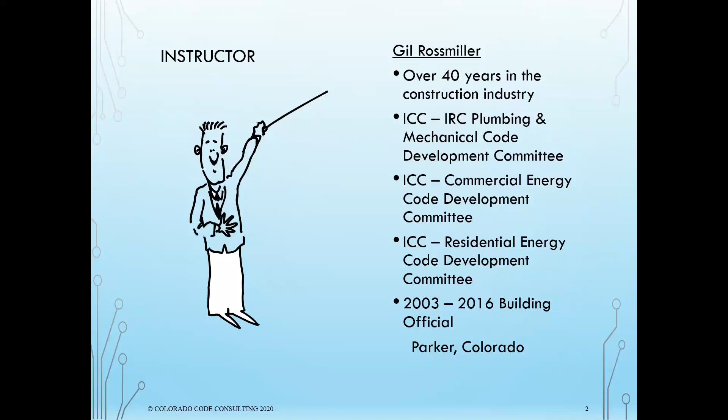So today, COMCheck. Like I say, feel free, type in a question, ask anytime you wish, if I start to go by something that doesn't make any sense, because believe me, there's going to be plenty of things that I say that might seem a little outrageous. So we're going to take a look at our thermal envelope, certainly the mechanical screens, service water heating screens, what we've got for interior and exterior lighting, talk about a few common mistakes that we typically see, and then take a look at some plan details maybe here, a few pieces.

So everything's free. This software is free. There's no cost to it. It is updated every 3 years, and they're constantly getting the bugs out of it, so there's updates every now and again. But you just go to energycodes.gov/COMCheck. There's the link there at the bottom. Just put COMCheck into your browser, and it'll pop up.

The nice thing is that everything's been updated. You can get everything from the 2009 to the 2018 IECC, along with the ASHRAE standards that go along with it, the 90.1-2007 through 2016. You can use COMCheck Web, which is the online version, or you can download it to your PC. If you have a Mac, you cannot download the desktop version. You have to use the online version. They stopped doing it for Mac a couple of code cycles ago.

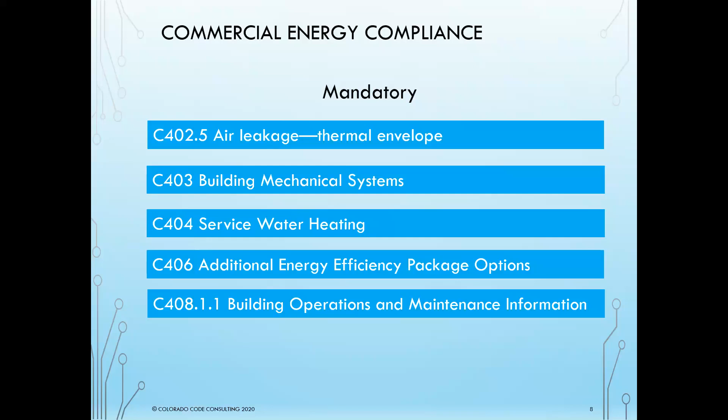So we've been over this several times. Commercial is easy: if it's not residential, it's commercial. I know, piece of cake, right? So the definition here for residential is detached 1 or 2 family dwellings, multiple single family dwellings, so a single family, a duplex, or townhouse, and any group R2, R3, or R4. But we've got to be 3 stories or less in height above grade.

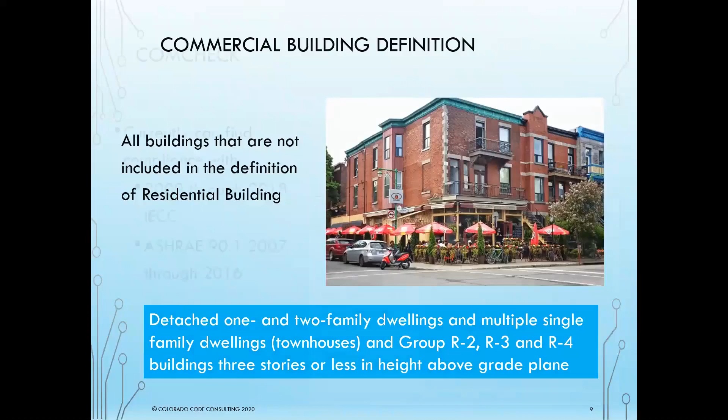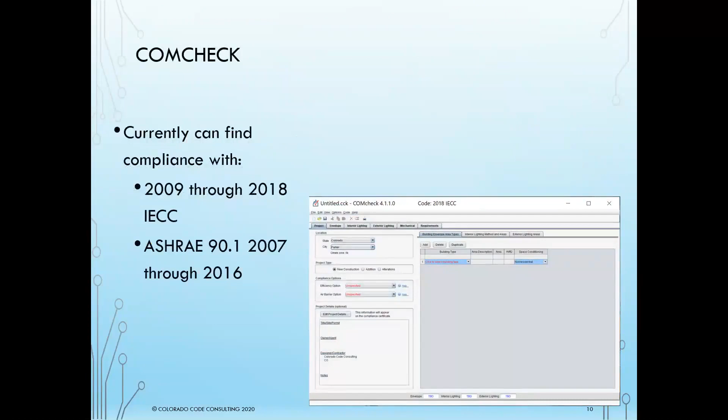Okay, so we kind of pointed this out earlier. We'll see the little drop down that we can find compliance with, and we're going to get everything from the 9 to the 18, of course, 7 to the 16, as it deals with ASHRAE. So here's what we've got. Building thermal envelope is the only piece that you trade off on, period. 9 times out of 10, we see that the slab-on-grade insulation is traded off, not always, but that's fairly typical. When you deal with any of the mechanical systems, it's pass-fail.

You either have the right efficiency and the right fans or you don't. Interior and exterior lighting, same thing. You either meet the watts per square foot, or exterior lighting for parking lot lights, or light washing the building, lights lighting up the building. It's pass-fail. So you either do it or you don't. No trade-offs. Can't do it.

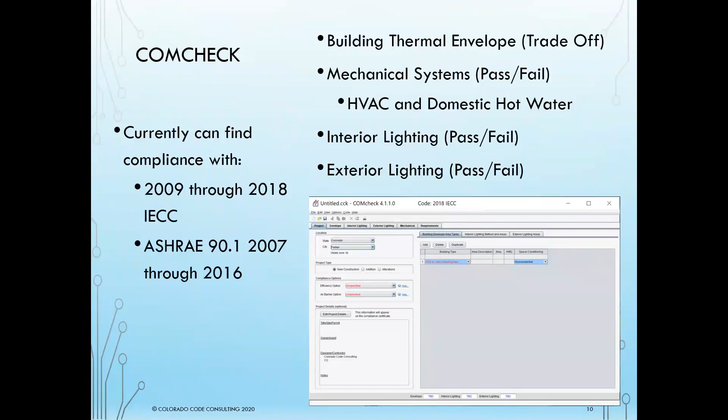This is a code section that allows COMCheck to work. Before the 15, there was no section like we had in the residential code, where it talked about the total UA trade-off. This is very similar to that. The piece that's underlined here is the piece that was added in 18.

Okay? So the beauty of it is that in the bulk, in that first paragraph there, it basically says it doesn't care what the U value of any of your stuff is. Look at that, U, C, F factors in these tables, we don't care. And you can have as many windows as you want. That's what this maximum allowable fenestration area section talks about. As many windows as you want.

So if I'm using COMCheck, and COMCheck now works correctly, it didn't always, but it does now, I could have 100% glazing on the outside. And if I've got really good windows, I'll be able to pass, and I won't have to go performance.

Because if we do prescriptive in the energy code, at least commercially, 30% is our baseline. I can increase to 40% window to wall area if I have daylight controls. But once above 40% and I'm doing the prescriptive path, I've got to go performance unless I'm using COMCheck. If you can get COMCheck to work, more power to you.

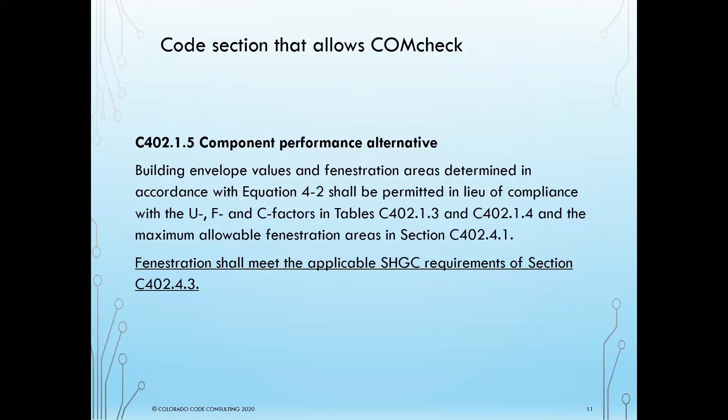Here's the equation that they talk about. Basically, it's just a great big fancy spreadsheet. If you sat down, you could just make a spreadsheet on it and move on with life. Not that we're going to get into that, but this is the equation. Honestly, I made a spreadsheet, and it actually works quite well. COMCheck is much more sophisticated than that, but what it boils down to is a spreadsheet.

So it's basically a trade-off between what the table allowed U values and maximum areas are, and what you are actually doing in your building. That's what any of these softwares do. They create this geometric twin within the software. Once I get the building built, the software says, if I built it per the code, this is what it would be. And is the way I'm going to build it as good or better than the way the code would have done it? So it all goes back to the prescriptive tables as the baseline. All of them do the same thing.

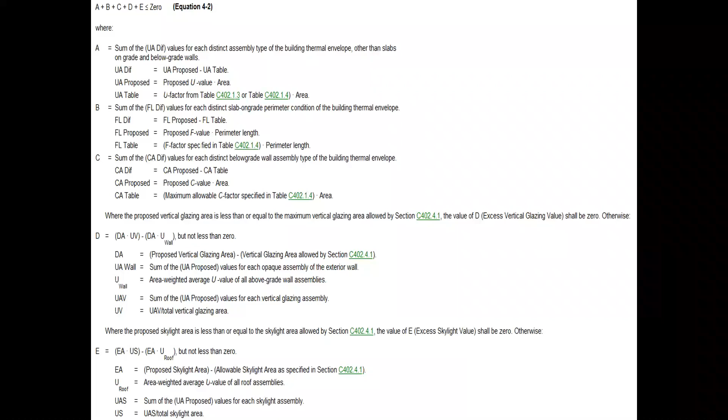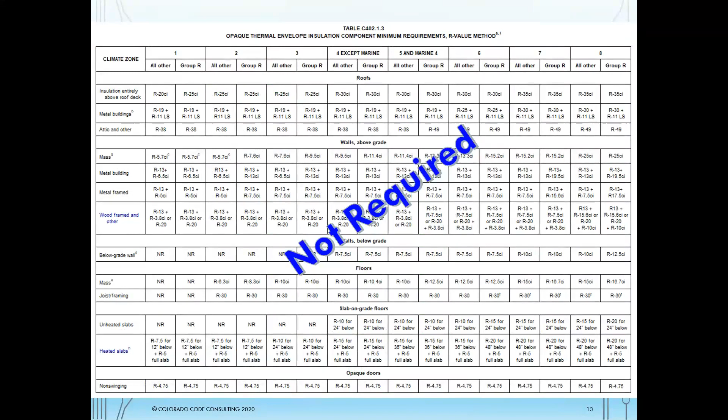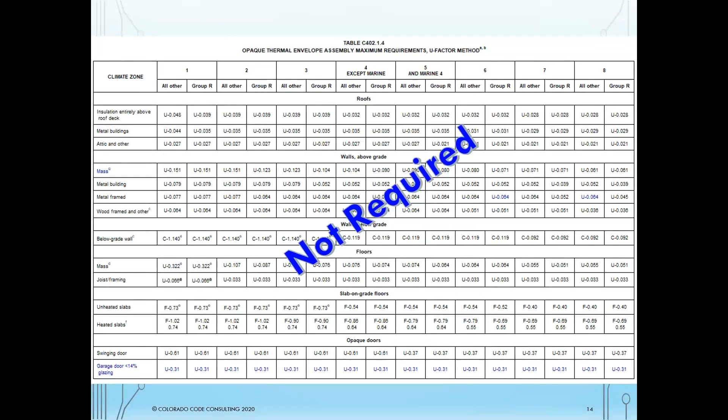So here's that table that's not required. If I'm using COMCheck, I don't care what this table says, because I can build it any way I want. Now, what we call the reference house within the software is coming back to this table here. It's the R value, or more specifically, the U value table. Doesn't matter. Don't have to worry about it. Use what you want, but this is what the reference house will use. This is the table.

Then we've got this maximum area piece. Remember that? Don't have to worry about it. Maximum area, we don't care. As much glass as you want. 100%, 60%. As long as the math works, as long as my total UA comes out to less, we're in good shape. Or the same. It could be identical. Doesn't matter. I think I have an example where it's exactly the same.

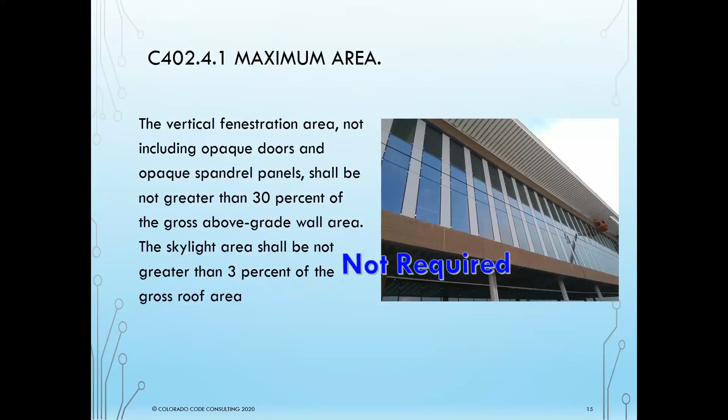So here is my fenestration table. We don't have to worry about the U factor up there, all the X's through it. All we've got to worry about in this table is the solar heat gain coefficient, whether it happens to be a skylight or vertical fenestration, the difference between a window and a skylight. The things in blue there are the only things that actually changed. So we had some solar heat gain coefficients change in climate zones 4 and 5. And for those of you that are unaware, it's all based on direction, okay?

And what we call projection factor, and I'll show you what that means. We've got some wonderful little pictures that show you how that works in COMCheck. They've got little pop-ups that are very, very nice, okay? So that's the section that actually allows COMCheck to work, and the nice little buffers and things that COMCheck will

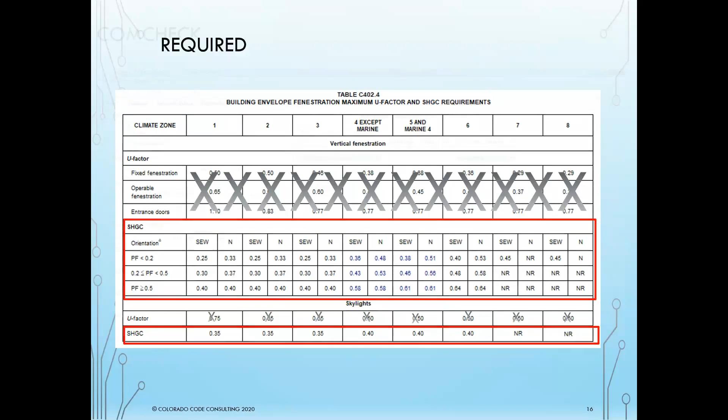allow you to do. All right, so here's just a screenshot, and we're going to start here with what it would look like if I were to open up a project in COMCheck. This is the desktop version of it, and we start to pick what it is we want to do with it. Okay, so we do a drop down on the code. We're going to have, obviously, much more choices in the 18 version. This is clearly a screenshot from an earlier version, but you go all the way up to the 15 and

the 18. Then the codes you see below there, the 14 New York and Carolina, these are special ones, and so they have amended the code. So this brings up a great point. If you have amended the energy code so it no longer matches what the code says, you can use COMCheck, but you're going to have to figure something out. So for instance, let's say you make it more restrictive or, quote, more energy efficient. So instead of saying you have to have an R20 wall as an example, no, it's got to be an R23, right?

You would have to figure out then how much percentage-wise they would have to pass by, and jurisdictions have done that. Jurisdictions will say, well, if you use COMCheck and you base it off, in this example, the 2012, we've actually made it more energy efficient, so your thermal envelope has to pass by at least 3%, as an example. There are some jurisdictions that have made it less restrictive or, quote, less energy efficient. And you would do the same. You would just say, well, you could actually fail by 3% and still pass. And so the jurisdiction would have to figure that out.

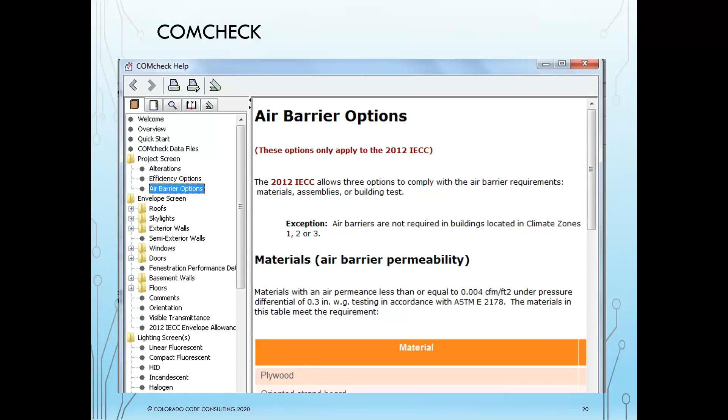So here, project, we're just picking out the location. So it's got all the states in there. It's got most of the cities in there. The directions are, if your city doesn't happen to show up, pick one that's close.

There was a time Parker wasn't in it. Denver was the closest one, but now actually Parker's in there. So they've got quite a few cities in there. This one happened to be picking new construction.

This is the slide. So we've got these energy efficiency options, and this is kind of nice because what the software does now is it actually keeps track of it. So there's obviously far more choices now than there was in 2012, 18. I think there's 7 or 8, maybe 9 different ones that you can pick. The beauty of it is that once we pick one, it needs to be throughout.

And this is one of the mistakes that we start to see, and it's not that uncommon. What ends up happening is if we have a COMCheck that's done, you might have the architect that does the COMCheck for the thermal envelope. And then you might have the mechanical guy that does it for the HVAC heating and cooling systems and service water heating. And then you might have the electrical designer do it for the interior and exterior lighting. And that might be 3 separate COMChecks that they're creating, and they may not pick all the same options.

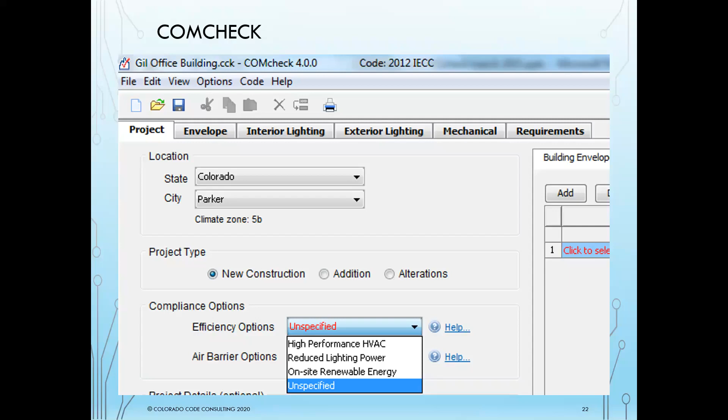Then we've got the different air barrier options here. We've got the air barrier permeability, which is just that big list that we've got. The assembly piece, which is I have a certain assembly, the plywood or whatever the assembly is, the sheetrock and the studs, and they can have a test. They can actually test the assembly if they wish, or they can decide to do a blower door, and that's still the same in 2018. That is not a requirement. Blower door is not a requirement for commercial buildings in the 2018. It still remains not required.

So we've got project details, so we've got building envelope areas that we need to put in here. So we're still on our very first tab. So we've got tabs here that we're starting to fill out. So this is the first tab, project, building envelope area types. We got to get those put in, or it won't let us go any farther. It'll keep saying not done. Now here we're just picking out what the building type is, and this list goes on. So we just pick what it is. And we can have different building types, right? So we might have different pieces within a building, which is fine.

And then we just pick an office. I just picked office for this particular example. We put what the area is. I didn't decide to put in an area description. The designer could certainly do that. And then is it residential or non-residential? Well, office is pretty obvious. It's non-residential. So that's pretty clear. You'll be able to see that on the report too.

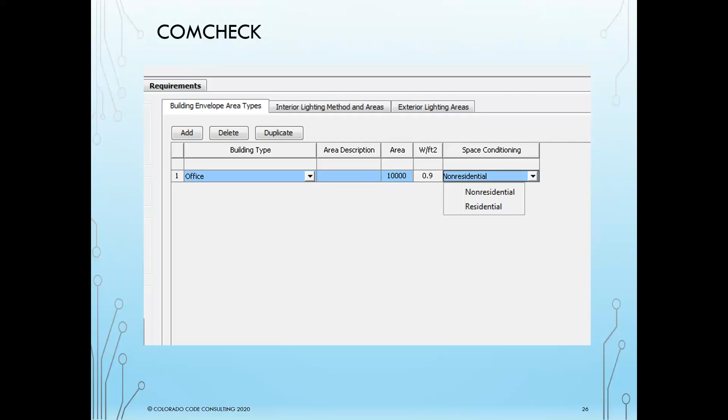And then you'll notice that we've switched tabs here. So we've moved from building envelope areas to interior lighting method and areas. So we've got two different choices here. Building area method. We've had this since 2015, and ASHRAE's had this forever. Building area, I would just take the entire building. So if it's an office, I'd say the whole entire building's an office.

The office has no hallways, it has no conference rooms, it has no bathrooms, it has no storage areas. It's just all the wattage is the same throughout the building. Then, as I've selected here, we have this space-by-space method piece. This is a fairly popular one because you get more bang for your buck.

Now you can actually go to different spaces and say, okay, I've got a break room area, I've got lobby areas, I've got office areas that are open or enclosed, I got a restroom, I got a stairway, I got storage. And so we can go on all these different types to get these choices to say, oh, well, I want so many watts per square foot here and here and here. And the biggest bang for the buck is the retail. Retail areas, you really get the big bang for your buck.

Retail areas, you can really pile on the wattage for the sales areas, depending on what you're selling. There's 3 or 4 different increases that you can get so that you can have more light on your clothing or on your jewelry or your pottery or your pictures, whatever it is that you're selling. So you can really get a lot. And if you pick building area, you can't do that. It's just straight wattage per square foot. So that's why you'll see a lot of space-by-space methods.

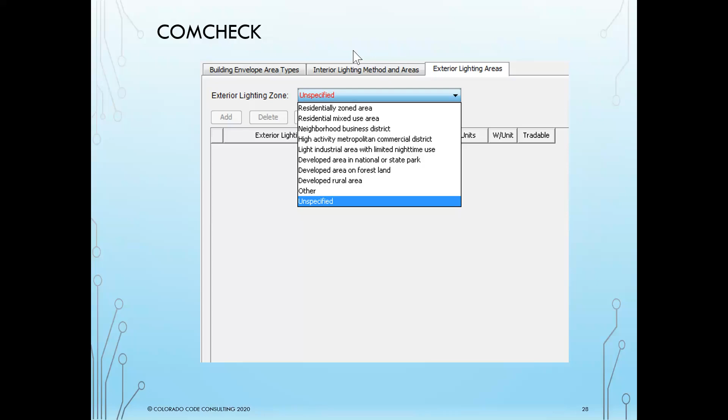These days now, with the advent of LED, I rarely see any exterior stuff fail, just because of the technology that we have today. Let's see. So I picked a neighborhood business district just for something to do. Then we can actually go through and say, well, what do we got? All kinds of different choices, different lighting allowances for main entries or parking ways or driveways or the entry canopy. You're going to have exemptions that you can put in here, emergency services, loading area, things of that nature. There's going to be things that are exempt for this.

So anything that has to do with life safety, means of egress, any of that type of thing, or maybe it's a high crime area, as an example. They always want the alleys in the back of these buildings lit, which would be perfectly acceptable. That would be exempt from any of the wattage requirements, as an example. So they just pick what they've got, ATMs, where they have walkways, stairs, any of that. If they've got it, they can use it, not a problem.

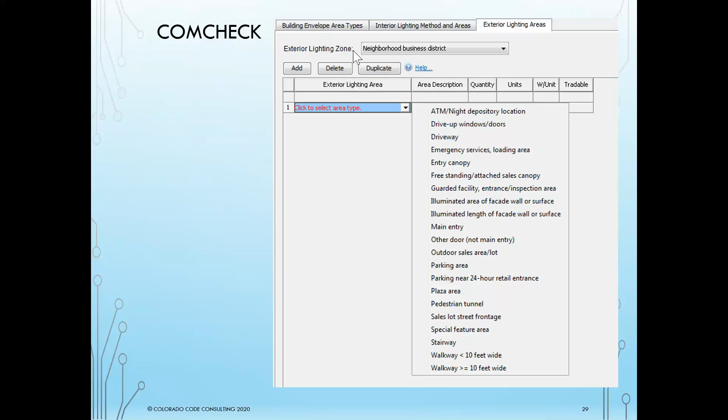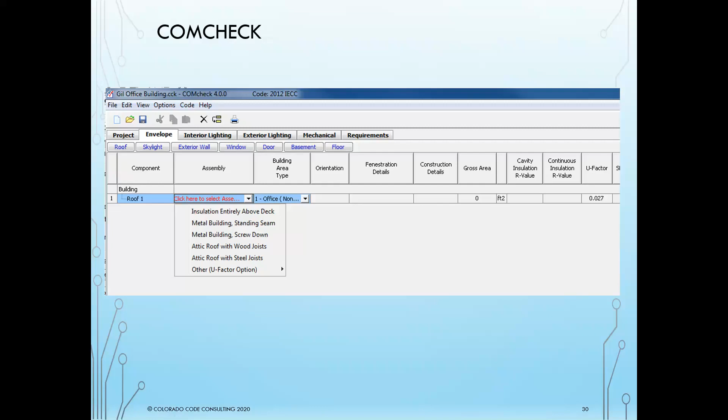We've got metal buildings, standing seam, metal building screw down, attic, roof with wood joist, attic with steel joist, and then we've got this other option, which we'll get to. All of them got an other, and I'll show you what that is here. I just, in this particular case, said insulation entirely above deck, and of course what popped in there was what we had in the very beginning. Remember, we actually put in that office piece in our project tab.

So if I had several different areas, I could separate the roofs out. So while I'm at that, you can glom together or put together all like assemblies. And you'll notice that I'm not using an orientation here. You don't have to use an orientation. Okay? You can actually put all together. If all the roofs are the same insulation value, all over the entire roof, you can just put one roof in. The only time you'd have to do another roof is if it had a different assembly.

So let's say you got some that have an R30 above the deck, and let's say you got some that aren't, well, they're only an R20 for whatever reason. Or I've got two different types of roof. I've got some flat roof where it's all above the deck, and I might have some vented attic space. I mean, that's absolutely possible. So it's depending on how many different roof type assemblies you've got, but if it's all the same, you only need to put in one. Okay.

All the software wants to know is, what am I doing for cavity and what am I doing for continuous? Because it would be in addition to any of those other assembly pieces, sheathing, sheetrock, that stuff, already in there. That's why there's the other category, and we'll give you an example of that. Do not panic. We will give you an example. So anyway, this one, I don't think I put any continuous, and here we get all the different types.

So we got wood frame, 16 24, steel frame, 16 24, metal building. Okay, so we've got a steel frame building; difference between a steel frame building and a metal building. So steel frame building is going to be steel I-beams and metal studs, essentially. So we got I-beams that are pretty much the structure, and then steel studs that run between them or in front of them, just to create the exterior walls.

A metal building would be like a Butler building, where we've got purlins, a giant superstructure, and then purlins or girts for the walls, and then we've got insulation that's going to be sandwiched in between them. So here, again, we run into all different sets. So if I pick solid concrete, or I come down here and I pick a concrete block, well, then I get a whole bunch of other choices.

Well, what is it? Well, you tell me, because is it 6, 8, 10 inches, partially grouted? And then you're going to say, oh, well, if it's partially grouted, cells empty, what does that mean? Well, we can go back to help. What does partially grouted, cells insulated mean? Well, go back to the definition.

Now, there are limits to how many of those cores can be filled, grouted. So we've got vertical cores that'll be filled. I mean, they're all going to be reinforced. I don't know how many unreinforced buildings we get built these days, unreinforced masonry. I don't know that we do. Then we've got what this insulated means.

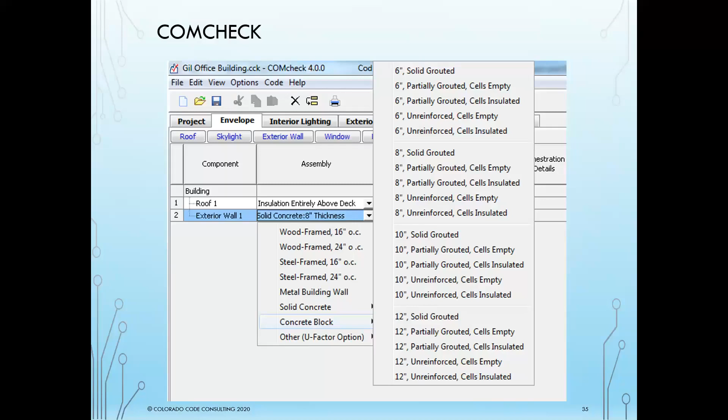Okay? All right. So we just happen to say furring none. We don't have any cavity or continuous, so I just set that in there for fun. All right. So let's say other. So now we're going to get into this whole other piece. And this you will see on commercial buildings far more than you will see on a residential building. And what this allows the designer to do is to design their own wall, or their own roof, or their own floor, because they all have this option.

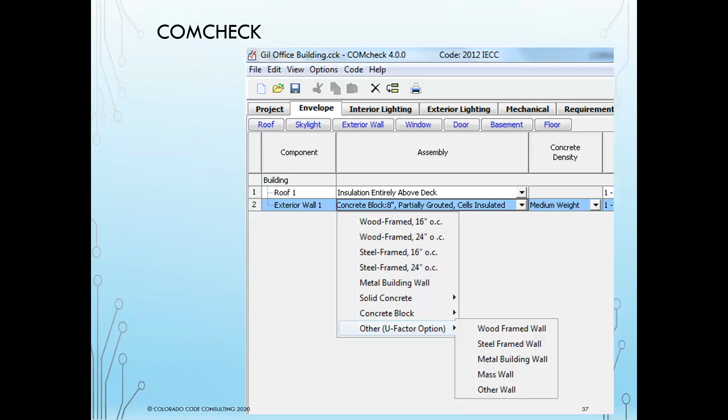Meaning, you know what, I really don't like what COMcheck does for defaults. I really don't like my R values for the sheathing or the decking. And you know what, my framing factor is a whole lot better than what they say it is. Okay? So once I pick one of those, this is what you get. This is the little warning that comes up to the designer. You never see it on a report. You'd only see it if you actually do one.

It says, assemblies with a known assembly U factor: enter the overall assembly U factor for the assembly in the U factor field. The U factor is assumed to be consistent throughout the entire assembly. So what that statement is saying is, if I build a wall with 2 inches of foam on the inside or outside, half-inch OSB, 16 on center metal studs and 5/8 sheetrock, it's that way throughout the entire building. Okay.

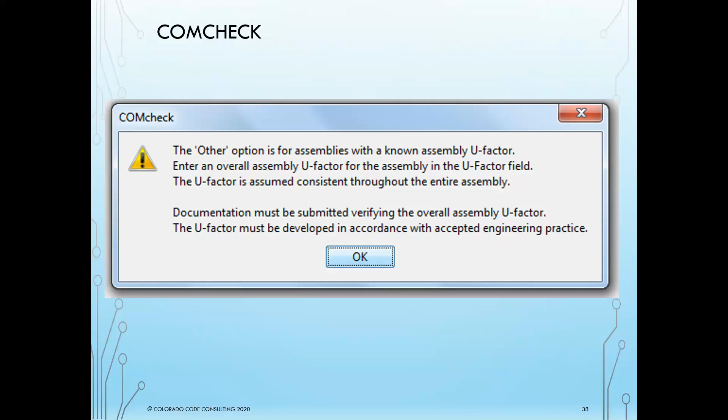Then the most important piece is documentation must be submitted verifying the overall U factor assembly. It must be developed in accordance with accepted engineering practice. So what they're talking about is the ASHRAE Book of Fundamentals. Okay. So what we're going to look at here is just a really simple wall assembly. Nothing particularly fancy here, but it gives you an idea of how and what you should be looking for.

Okay. So we have R value at the insulation itself. Yes. We're going to have an R value at the stud. So we kind of have two different columns going on here. Because we have cavity insulation in this assembly, there's going to be a thermal break at the stud itself. So as I start to look down to the very top here, we've got 0.17, and that is my exterior air film. So these do have an R value. It's in the ASHRAE Book of Fundamentals, and what I'm using here is the generic ones that are generally accepted.

So if you see anything different than this, it shouldn't be too different. It should be pretty close to what this example says, regardless of the assembly. So we got a 0.17. Then we come down to my half-inch wood. It's got an R value of 0.18. Oh, well, we'll get to that.

Then I've got, looks like a 1-inch insulating board. Got an R value of 3.57. It's the same at the insulation as it is at the stud because it's continuous. It's over the top of the stud. Then the next piece we got is the R13 batt. So the R value at the R13 batt is 13.

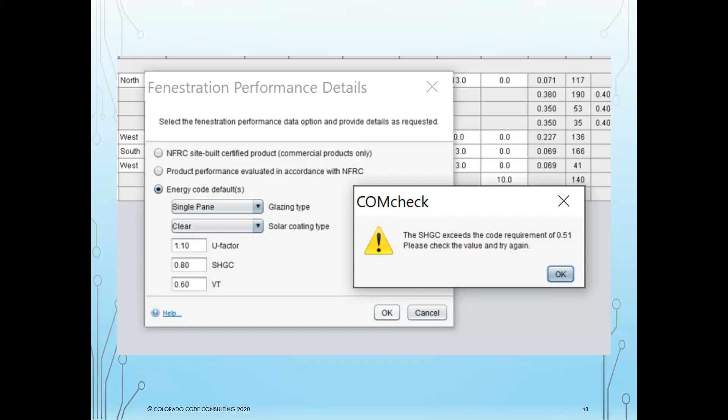Maybe there's another reason. You're putting in an addition and you want the whole building to comply instead. That kind of thing. Okay? All right. So now let's see what we got.

Doors. Yeah, don't worry. We're going to get to that. I don't know why I don't have it yet. Maybe I have it toward the end. But I do have examples of what we would use for plan review for the U values and solar heat gain coefficients, and what document you should see, because you won't see the actual CMA certificate until the windows are showing up at the job site. But there is a document that we can get for plan review purposes, and I do have an example of that. It just must be later in the slides.

Sorry about that. So teases you, keeps you on the webinar. Yeah, I know, it's so intense.

Okay, so now we just go through the other different components here. We got doors. We've got projection factors. Again, glazing. So if we've got doors that we're putting in, is it insulated, metal, is it wood, glass? If anything is greater than 50% glass, it's considered a fenestration. You'll have to meet the window U values. Otherwise, if it's less than 50%, it meets the opaque values.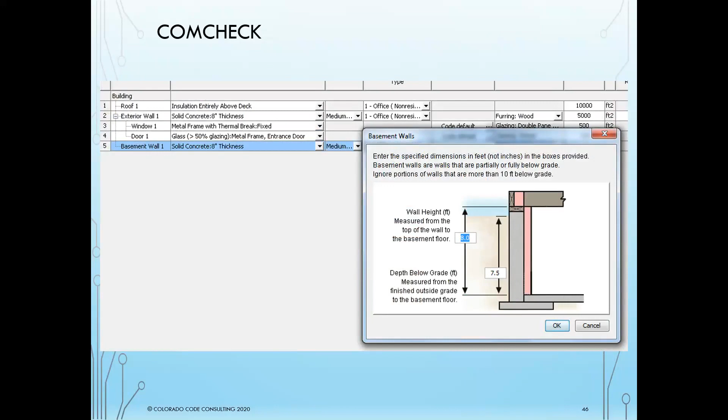Here's the nice little piece that comes up when we deal with slab on grade. Again, this is probably one of the biggies that they don't get. They might show that their slab on grade has insulation. They might say, it's got an R10 and we're 24 inches, just like I'm supposed to be. But when you look at the construction details, they all stop right at the bottom of the slab. So rather than coming all the way to the top, like it's supposed to be here in the picture, it stops right at the bottom. That does not count. You cannot allow that to work.

You can do any of these things in this particular picture. You can do upper left there that's got little a, it'll be on the inside, it can be the outside, it could be vertical, it could be horizontal, it could be vertical and horizontal. It could be all of it. But what you can't do is not start at the top of the slab. It has to include the top of the slab.

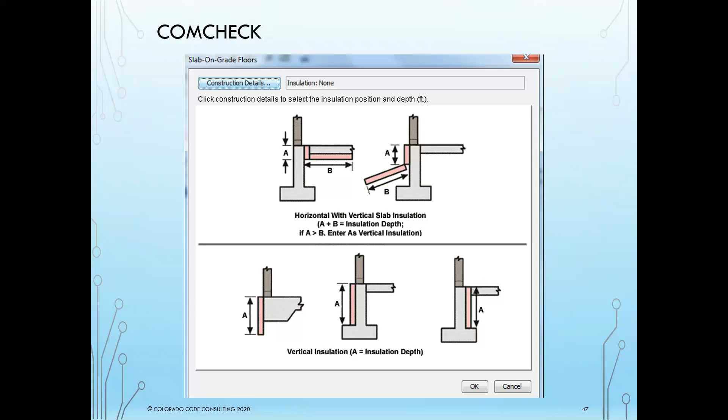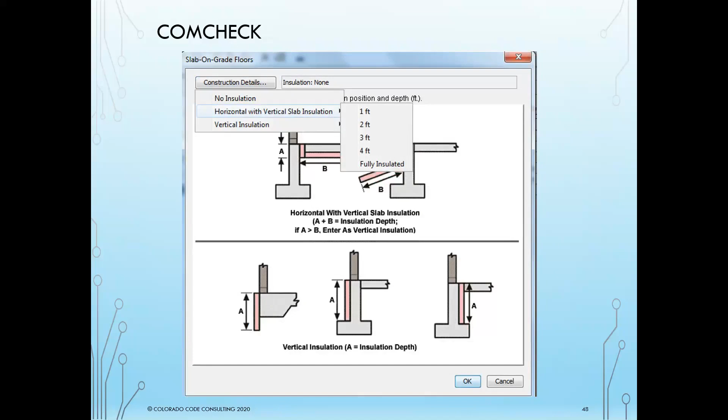Otherwise, it doesn't work. Here, it's just asking more questions about what's the depth? How is it working? Is it horizontal with vertical? Is it vertical only? It's just saying, what have you done? That way we can calculate and decide what's going on. So we do it horizontal, we do it vertical. I don't care as long as you do something. And if you do nothing, you would enter 0.

You would still enter it into COMcheck, insulated or not, because that's how you trade it off. So if I'm not going to put in insulation, I've still got to put in its linear footage. That is the key. I think that's the next, running length. So we're actually doing linear footage. It is the only input done in linear footage. Everything else is gross area.

I didn't say that before. So when I'm putting in my exterior wall, you see that input there? I've got exterior wall, I said it was solid concrete. And notice how the window and the door are connected to that wall. So I put in gross areas. In that case, I put in 5,000 square feet.

That means it knows that out of that gross area, I'm deducting 600 square feet, because I've got 500 square feet of window and 100 square feet of door. So that's why I use gross areas only. Do not deduct windows and doors out of the gross wall area. The software does it for you.

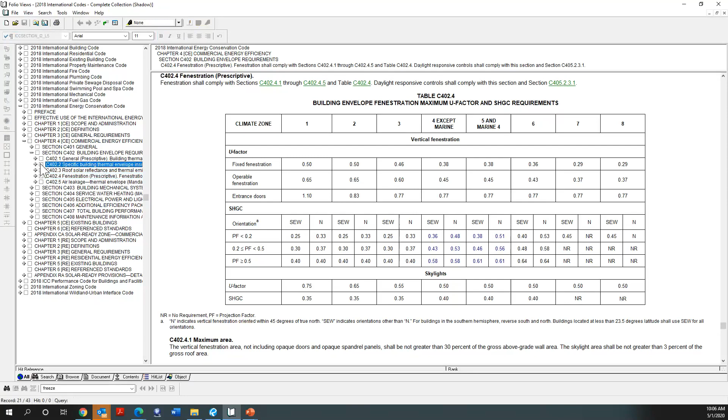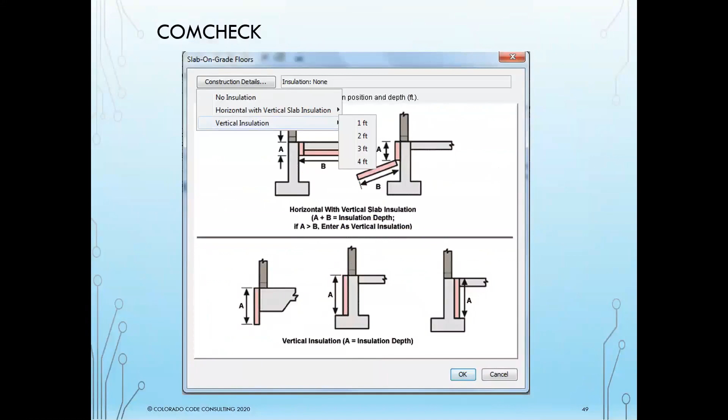So let's see. Hopefully you're seeing the codes now, and it's going to be specific thermal stuff. Slab on grade. I thought there used to be an exception for that. I am not seeing it anymore. Yeah, there used to be heavy termite stuff, but as I've said before, there are plenty of times when the energy code loses, and that might be one of them, because clearly that's bad. Good question. Very good question. Slab on grade, done. That's the thermal envelope.

Now we're moving on to interior lighting. Pretty straightforward. We're just basically entering what it is they've got. It's pass fail, pretty black and white. When they do any type of lighting, they've got all kinds of drop downs as to what type they're doing. Then we've got all kinds of different choices, and there's even more now in the 18. We're getting into more of the LED stuff.

We don't see any LEDs here back in 2012, but they've got LED choices now for any of the lights. And then, of course, there's other, for anything the software doesn't have. Then we're just looking at whatever documentation they've given us: okay, they've used other, these are the lamps they're using, this is how many watts, and this is how many they have. So we just kind of walk through.

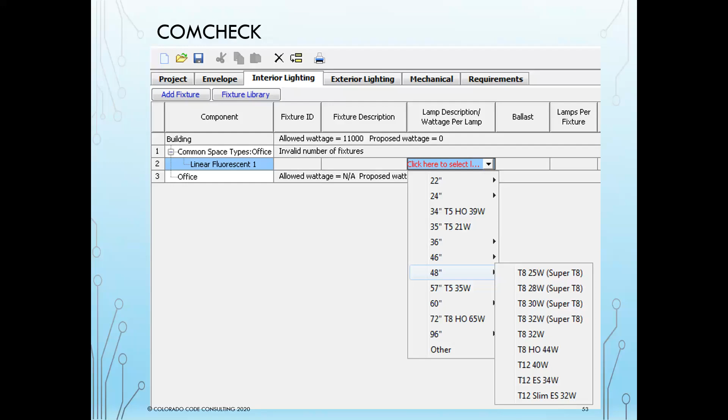They give us the ballast here. They give us how many lamps are in each of the fixtures, how many fixtures you have, and what the fixture wattage is going to be. Track lighting is a little bit different. I don't know that I'd give an example of that, but it's basically how many watts it can have.

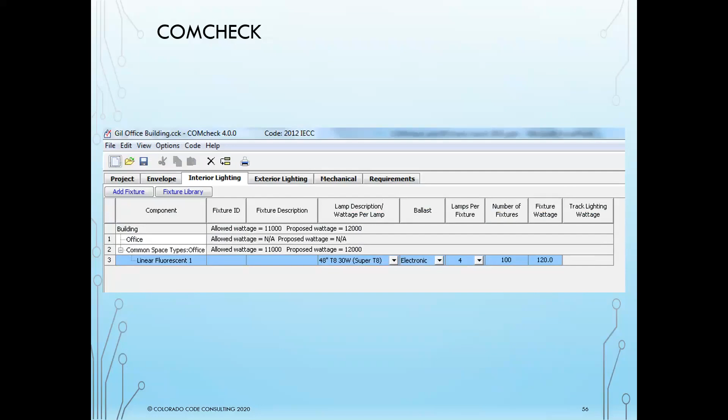I think I might have a few screenshots. But honestly, it's just what lights do they have, and they put them in. It's just a way of showing compliance. Here's track lighting. We've got all kinds of different choices that still comply with code: circuit breaker capacity, track wattage itself, current limiting devices, and if we're doing low voltage track lighting, we're just looking at what the transformer is doing.

Track lighting here, again, they just give a little piece about what it is. I would go on to the 15 and the 18 and the newer stuff. We get choices here with the new codes, and it's the same for the 18 now, depending on what they're doing. 30 watts a linear foot, the breaker, or wattage limiting device, because back in the day, you had track lights that might be rated for 100 watts a foot. You could really load those bad boys up. And the code said, guess what? You're going to do what it can take.

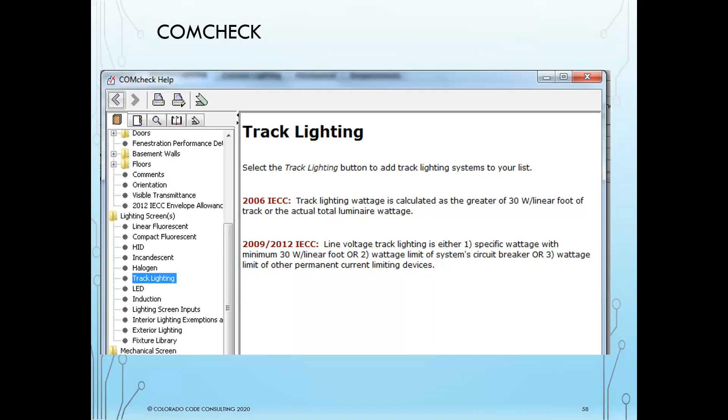That's the killer. Track wattage here, they just get the different drop downs. Then just tell us what it is. What are you doing? What's it actually at, and what do you get? Because it's what the track can do. Because this is probably one of the biggest things that happens.

The designer says, yeah, they're going to do X, and they put it in, and then we walk in, and guess what? They don't have one 8-foot track. They got 10 8-foot tracks, and now they're in trouble. They say, oh, well, back in the day it was, we're going to take out the incandescent bulbs and put in LEDs or compact fluorescents or something. Not particularly code allowed, but there were times.

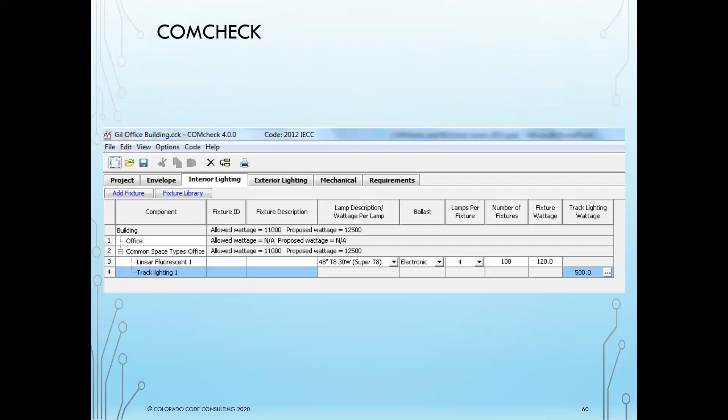Fixture library, this is just a place for your designer where, let's say they use these fixtures every single time, or this is something that is very typical for them to do. They can just create a library of different fixtures and just say, hey, I'm going to pick from my library, just do this, this, and this, and that way they don't have to go through all the different steps. Just makes it simpler for them to do it.

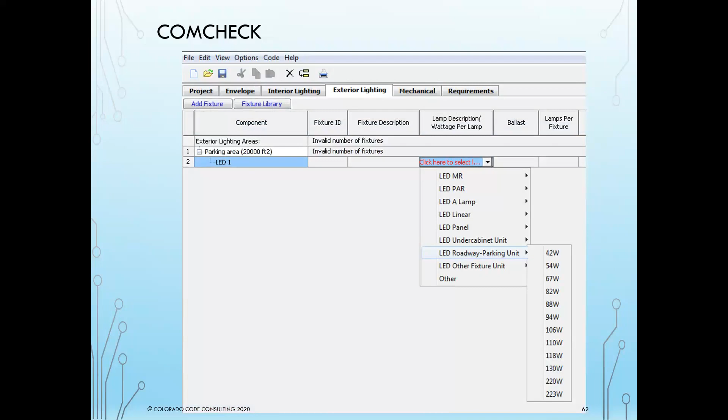Exterior lighting, same thing. Pretty much the same deal. We just start to pick what it is that we're doing. LEDs and what's the watts, or panels or other types of fixtures, or all kinds of different lamps. And if they don't show it, put in others, get the documentation, and there's just a count. We have how many lamps per number of fixtures, and what we got for wattage. These are obviously screenshots from the whole picture, but they would just go light, depending on the parking area.

I remember those exterior lighting areas. Same thing with the interior lighting areas. That would have been done on that project tab. So if we had 5 different types of exterior lighting areas, we would have put that in our project tab back in the beginning, and they would have showed up here automatically. Then we would have just accounted for what we were putting in those areas. And we just verify that with the plans, what's going on.

So when we get to the mechanical piece, again, it's what are they doing? Central furnace, ducted, hydronic, a heat pump, we have PTACs there, that's that package terminal unit. We got maybe some radiant heaters in there. Do we have maybe a unit heater? Same thing with cooling. What's going on? What do we have? Typically what we're going to see is a ducted furnace and a packaged terminal DX unit. Pretty typical, especially on these strip malls, tenant finishes, that type of thing.

That's fairly typical. Then we've got single packaged DX units. It's just an air conditioner by itself, and then split systems. And then, is it zoned? Is it a single zone, multiple zones? The designer just picks what they got. So I just said we had a central furnace, and I picked single package DX unit. Then we just pick, is it electric? What kind of fossil fuel are we using?

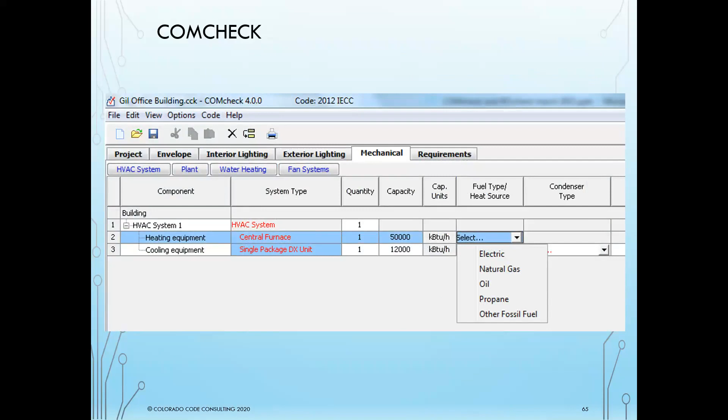Then is it air cooled? Do we have an evaporative cooler? Is it water cooled? Do we have a cooling tower? That kind of thing. Well, this one's going to be obviously pretty much air cooled.

Then it gets into this economizer piece. So economizers are free air conditioning, and especially for those of us here in Colorado, that's a big deal. It's free air conditioning. All that really is, it's a damper that opens up and it just lets the outside air in and cools the building. So if it's 65 degrees out and I want the building to be 75, you just open the outside air. You don't have to run the air conditioning.

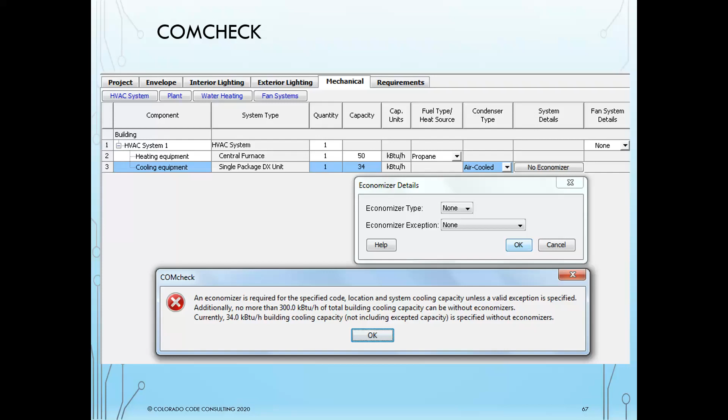And the beauty of it is that back in the day it was 34. Now it's 54 in the 18. It won't let you not put one in. With the climate zone that we picked in the very beginning, Parker, which happens to be climate zone 5B, it already knows you've got to have an economizer, so you can't not put one in. So it's nice in that the software just says, no, it's required, guys. You've got to do something. So you get a little pop-up.

And it's been updated every 3 years. We update the efficiencies on all the different conditioning appliances, all heating and cooling equipment, fans, all kinds of stuff. Every single code cycle they're updated, basically through ASHRAE, and a lot of those are all in 90.1 and all in IECC. Beauty of it is they won't let you put anything less than what's required.

So it's like, I'm going to put in a 12 SEER. No, it says right there you've got to have at least a 13 in this particular example. So guess what? You're going to put in 13 if you're going to pass. And then we're just verifying on the plans or the documentation we're getting from the designer, is that really what you're putting in or not?

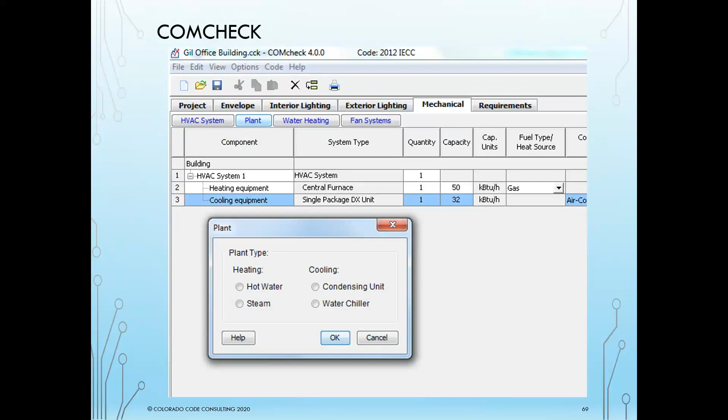And then we can use plants. So we've got different things that are using heating and cooling plants, which may or may not be happening. These are going to be fairly large facilities or campuses. Then we have the service water heating piece. What are we doing? Is it storage? Is it instantaneous? Does it have a circ pump? Does it have heat trace? Does it serve a pool?

Then it's going to ask for what the input rating is, because how efficient it needs to be depends on the input rating. So we need to know how big is it? What's my turnaround there? If it has a circ pump, clearly we're going to have requirements for circ pumps, recirc lines, insulation, controls. We just can't have that pump running continuously when there's nobody in the building. Why are we making sure there's hot water to all the different faucets when nobody's there using it?

Same thing with fan systems. This is just a place where the designer can load in the different fan systems he's got. These would be for very large systems where we start to regulate efficiency of the motors themselves. They go in and put in what they are, if it's supply or return, and what it's doing. And then we put in the horsepower, and again, based on the volume and what it's doing, it already knows what the code says. So you're not going to be able to put in anything that's not allowed.

Then what we have here, and we'll get to this when we get to the online step, it'll be much more interesting. This is a place where the designer can actually go through this little checklist. You see here we've got these different buttons for all the different places we can do our checklist on. The beauty of these checklists is that they give us an indication of what's important. You're going to have colored zones, and when we get to the application, I'll show you what that is. What's the top 10?

So here we get to the piece where we get the whole thing. This particular project actually chose enhanced interior lighting controls. It happened to be a motel in Steamboat Springs, so a little bit cooler there, climate zone 7. Here you can see they got slab on grade, and they pretty much glommed everything together. And you can certainly do that. This is another piece that we generally see. You'll notice this one passes, 0.0% better than code. So it just has to be as good as prescriptive. Doesn't have to be better.

The other piece that we see a lot: notice what my windows said. Product ID not available. Solar heat gain coefficient was 0.22. My projection factor, they're saying, was 0.26. They got just short of 9,800 square feet of window area. But look what they used for the U value, 0.29. If you see a 0.29, you automatically know it is incorrect. Why do I say that? Because that is what the glass is. If you see a 0.26 or a 0.29, you almost automatically know it's wrong.

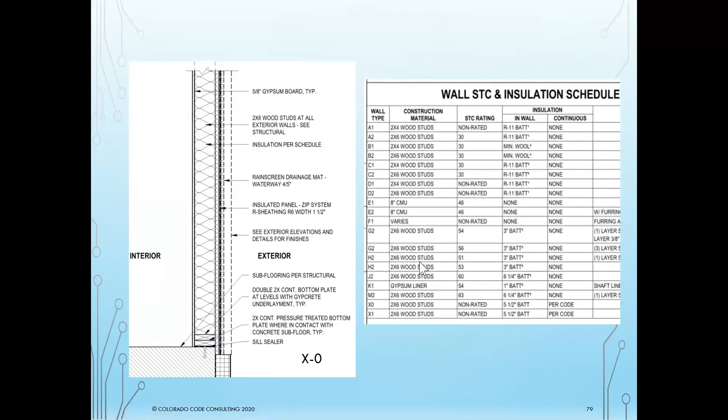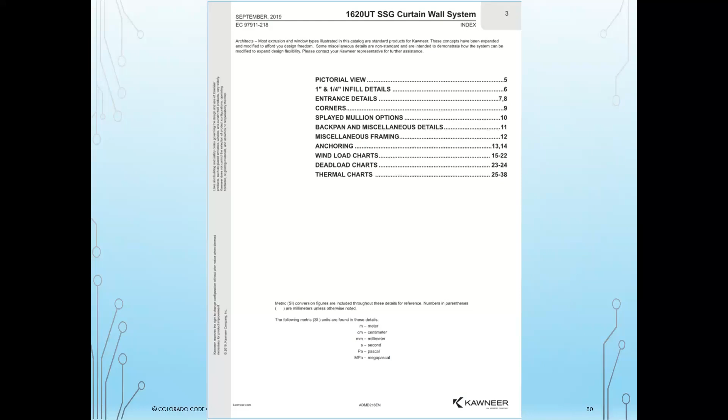It gives you the engineering for it, gives you the sizes, gives you all the cuts and the details, wind loading charts and things of that nature that it's going to hold up. What it's going to have in there is the thermal performance piece. This is what you're going to see for plan review, and this works. I accept this for plan review. What we're looking at here is I'm going to blow up one of those bigger pieces here. No, they didn't.

The thermal transmittance, so the U factor. And so what this U factor is relating to is what's my glass. So remember we said the glass in our particular case was a 0.29. Remember that? So it's right in between. So we're going to go over here and notice that it's going to be somewhere between a 0.38 and a 0.39. That's the overall U factor, and that's important, okay? Because it's a whole lot worse than a 0.29, is it not? Because that's what we're looking for, the overall assembly's U factor.

Just remember when we were looking at the wall, we looked at all of the components in the wall, did we not? Yep, we did. Same thing with a window. It's the glass, it's a spacer, it's the frame. And the glass is great. There's no doubt about it. Glass is awesome. It's everything else that really makes it not good.

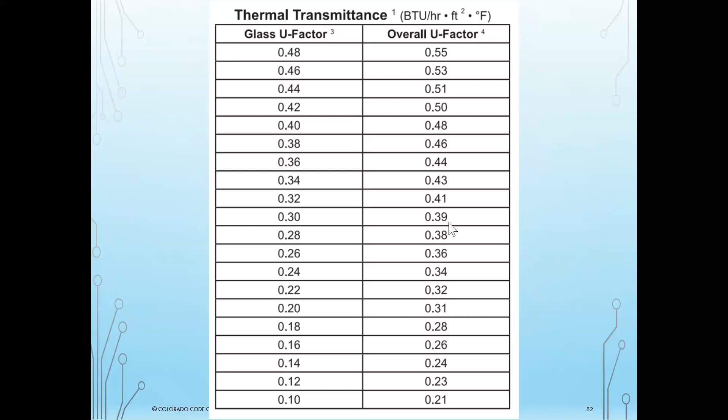Yeah, it's everything else. So unfortunately, I'm noticing that I don't have the certificate that you get on site. Sorry about that. What it's going to say right at the very top is NFRC certificate, and right below that, it'll say use for code compliance. You can't miss it. Okay? I apologize. If I got time at the end, I'll find it in the files and bring it up for everybody. Sorry about that. All right, so can a REScheck and a COMcheck complete on the same building?

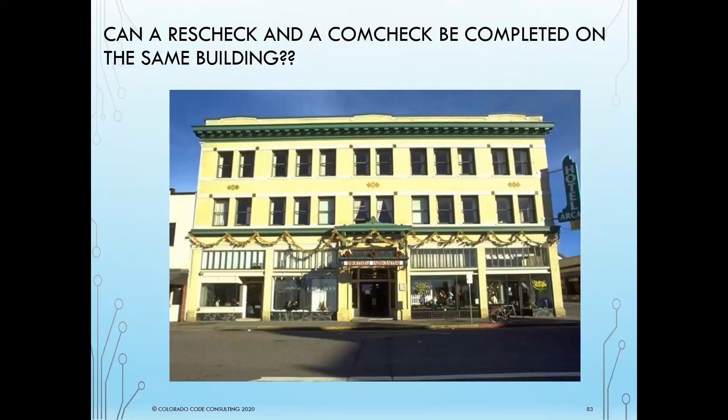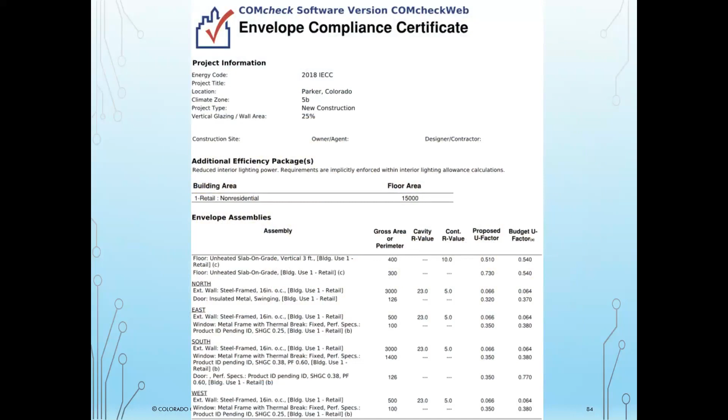Absolutely, positively. No problem whatsoever. Can be done. We'll do that. This one, I think, yeah, this one didn't have a ceiling on it. And I thought this went through, yeah, this didn't have a ceiling. This happened to be no ceiling, and you can see it shows 4% better than code. So you're wondering, how does that happen? How can you do that?

How in the world does REScheck allow you to do that? Well, the REScheck has no clue, dude. All it knows, or the COMcheck, pardon me, it just knows what you put in. It's just software. It's just doing math, okay? So all it knows is to calculate what you put in there. You'll notice that this one happened to be north, south, east, and west. This one happened to have 4 walls. But you'll notice on some of the others we looked at, it had 1 wall.

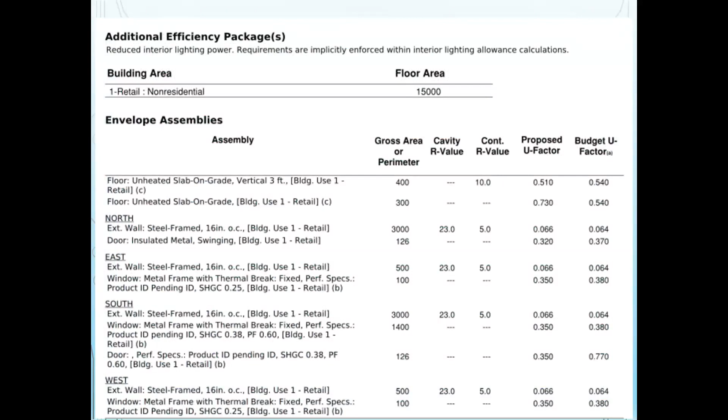Well, the software is not going to come up and say, well, you only got 1 wall. Don't most buildings have 4 walls? Oh, I don't know. Maybe it's a triangle building. It's only got 3 walls. Yeah, it doesn't know. This is where the human factor comes in and says, hey, you know what? We got to have it. Here, wouldn't it be nice if they were to sign it and stamp it? Some require the engineers to stamp it. That's up to each jurisdiction. That's something that they can decide.

So here's a REScheck. It's a 2-story, no floor. So it has no floor to it whatsoever. So what is it going to say? Well, it passes, but it had no clue that it had no floors. Well, it's because you didn't tell it to do it. So all it's doing is calculating what you input to the software. That's all it's doing. Okay? All right. Are we good?

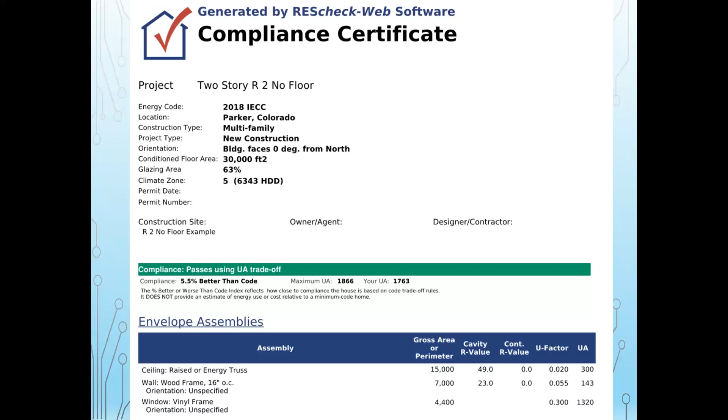You like it? So let's do an example just for fun. Let's see if we can make this happen. So we are going to make an attempt. Well, let's do this first. We're seeing a really simple little drawing here. And I know you guys all have your calculators and your thinking caps on and you're ready to go. Yeah? Okay. So before we get into the software, let's just take a few numbers down here so that we can all agree to disagree or all agree on the numbers.

Okay? So we've got a mixed-use shell building that's 50 by 250 feet. I got 10 foot of wall, IIB construction with an NFPA 13 system in it. Well, I don't care that it's 2B and I don't care that it's got fire suppression in it. Doesn't matter to me. All I'm trying to do is figure out my thermal envelope. All right. So what do I have? I've got steel trusses with R30 continuous above deck.

So if I took 50 times 250, I get 12,500. Does anybody disagree with that? Because I'm going to say I've got 12,500 square feet of R30 that's continuous above the roof. Yep. So far, so good. Okay. Not seeing any comments. Good. Let's see. We've got windows. So what do we got?

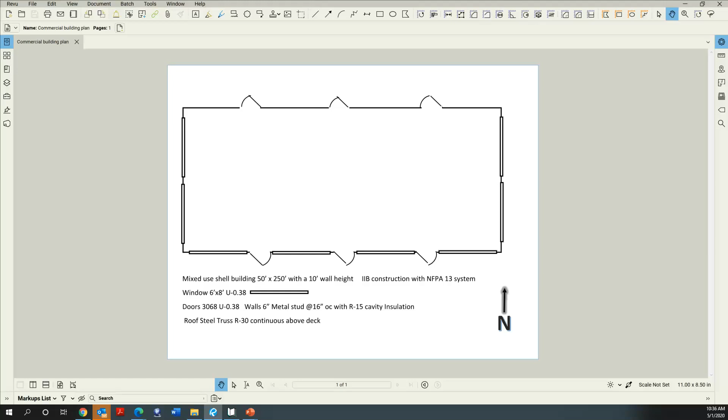Okay, let's see. So what do we have for gross square footage? Well, let's see. We got 250, 250, 50, 50, 600 linear feet. And since they're 10 feet tall, that makes it simple at 6,000 square feet. What else do we need on there? Any ideas? We'll move it along. Slab on grade. It's gonna be slab on grade. Okay, slab on grade, and we're going to use 600 linear feet. It is the only one that we do not put in for gross area. All right, so making an attempt to start COMcheck web.

Didn't mean to do that, sorry.

All right, so I'm going to go ahead and log in here. All right, so I don't know, we're just going to say new stuff. And since I've got it set up for 2018, Parker, Colorado, I'm going to leave it at new construction. What am I going to do for energy efficiency? I'm going to say reduce lighting.

Okay, so notice it tells me, you got to do something different. Let's do retail. And let's say I'm going to do reduce lighting power. Oh, got it. Building area. It's non-residential, and we're going to say it was 12,500 square feet. Yes. Yes.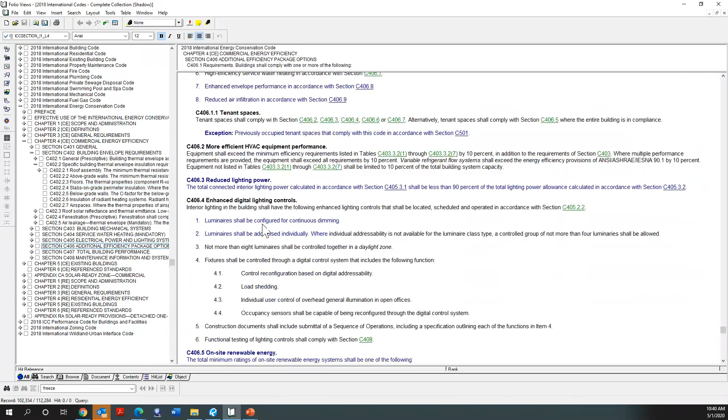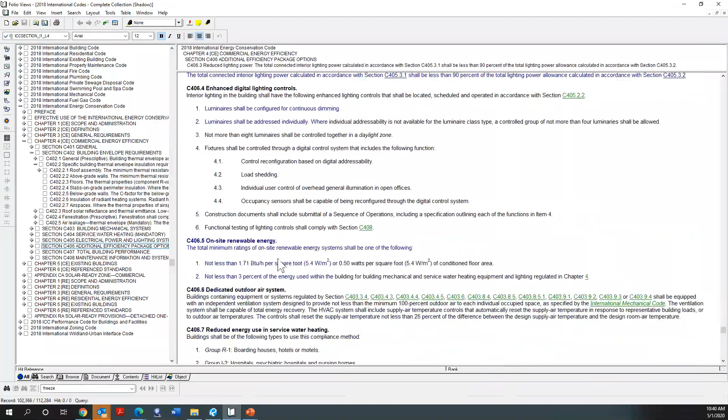Here's efficiency. So here, oh, service water heating, that's, yeah. Dedicated, where am I? Oh, the digital control. Okay, reduce lighting power. Total connected lighting power, right? In accordance with, shall be 90%. Yeah, okay.

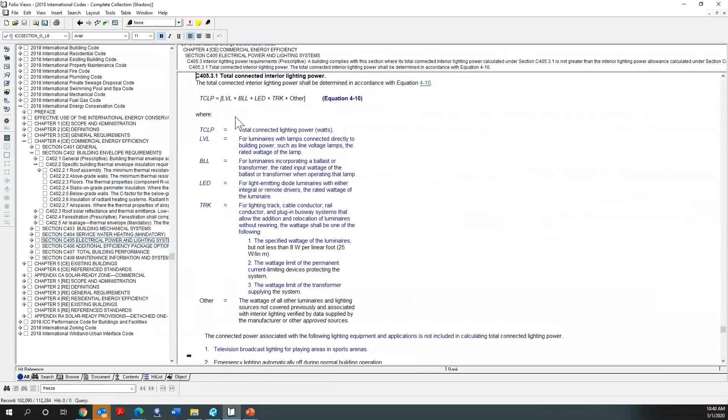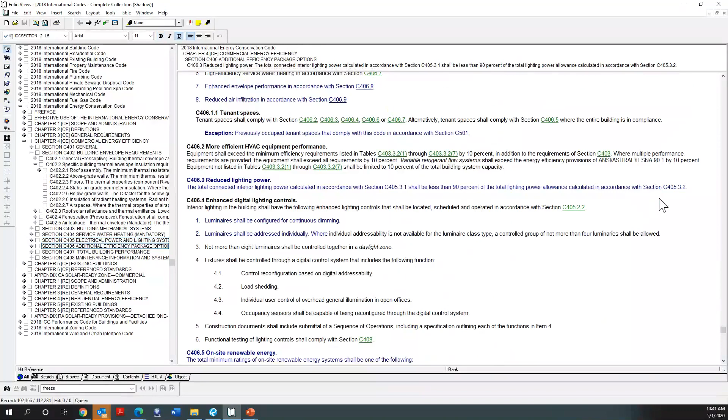So C405.3.1, yeah, duh. It's the same thing. And you go back to this one. I'll try not to change screens too quickly. Then, right? Oh, got it. Oh my goodness sakes. All right. I did not realize that. You know how many times I've taught this? How many times I've done it?

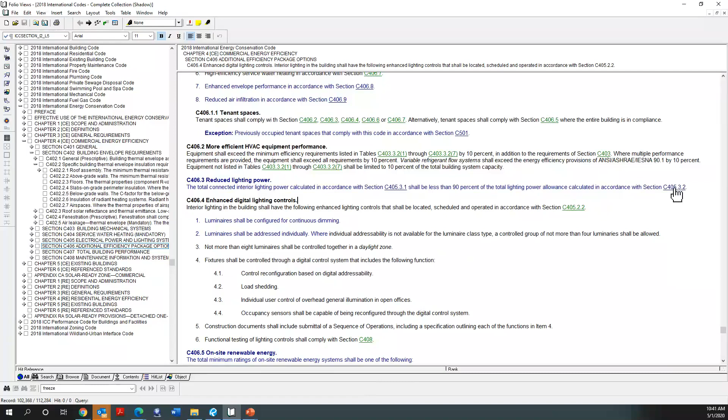Okay, so it said method, lighting in accordance with section C405.3.2. Okay, C405.3.2 is building area method. Actually it goes to both. It goes to the first table or the second table. That's another thing. The last time I did this, I found a mistake too. Well, this is a mistake. It should not be doing that.

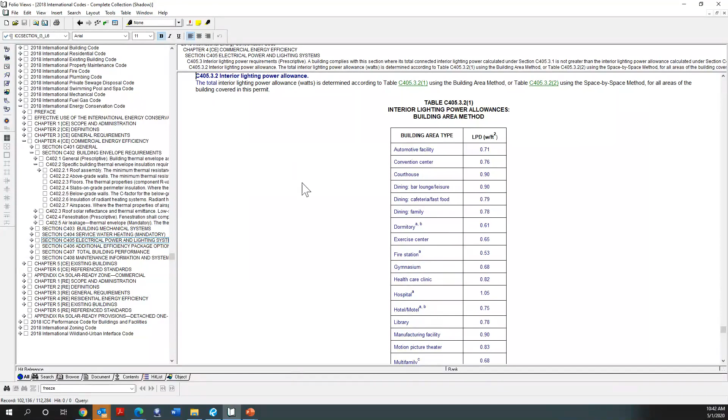They're really going to love me there at COMcheck on reduced lighting. I'll send them a note because that shouldn't work, and I'll have to check on the desktop and see if it's desktop too. Okay. All right. So back to this. So we got 15 minutes. I'll just breeze through this quickly.

So what we're going to do here is we got enough information here on the project to work with. So now we're just putting in what we've got. So I'm going to add a roof, and I said it was metal. What did I say? No, it's insulation entirely above the deck. Create roof, and create a building area type. And I thought we did. Retail, we did. I don't know what that's all about. All right.

And we said it was a continuous R30. Hit save. It said create a building area type, and I did. And for some reason it says create a building area type. Look at that. So I put in a roof. Okay? And I hit the check compliance, and look, I passed. Isn't that great?

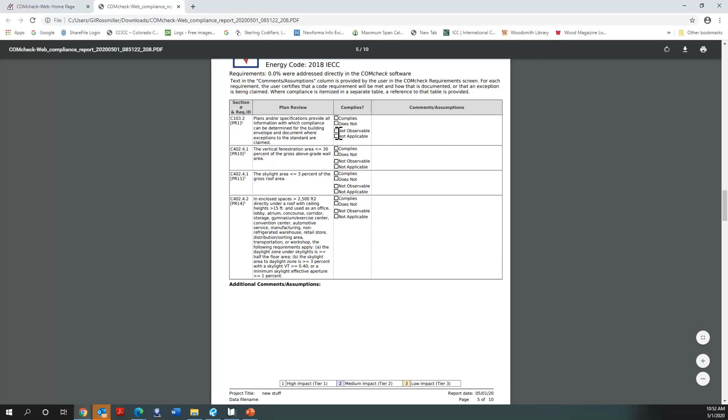So if we don't do anything else, let's make sure that we've got, does this comply, does it not? And these are the comments where the designer would have any comments, and the inspector can say, did we see it, or could we not see it, or was it not applicable? Then we get to slab edge. Looks like it's a Tier 2 piece.

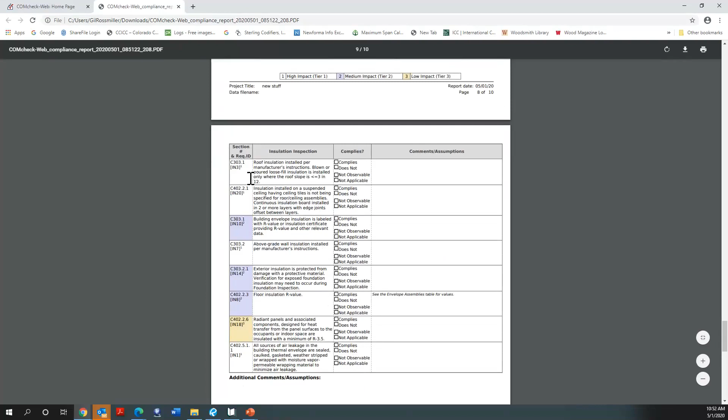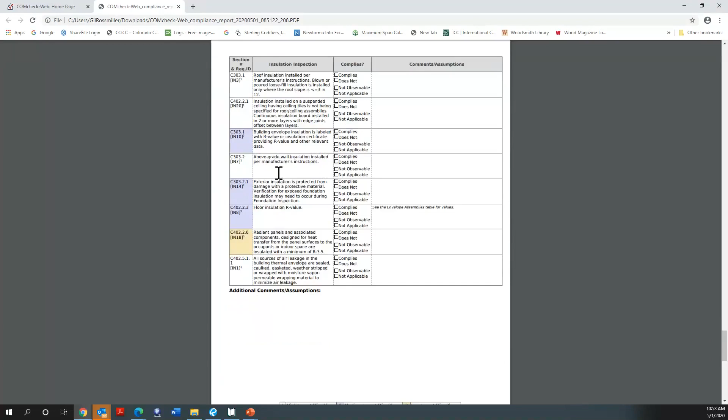And so we just go through, and the thermal envelope will have white categories, tiers 1, 2, and 3 to deal with that. But then if we had more mechanical lighting, it would go into controls. But this just happens to be the thermal envelope piece that goes to it. So you can see we've got all these 1, 2s, and 3s areas in it. So honestly, if all you want to do is the white, then concentrate on the white. There's nothing wrong with that. Again, we would see a lot more if I had done more in it.

Let's change to a different project where I've got stuff. If anyone has any questions at this point, feel free to unmute yourself or write in the chat, and we can go ahead and address them.

Gil, how often does the desktop version get updated? Is it every code cycle? Well, I'm assuming there's multiple updates, but yep. How often? Yeah. It seems like it's every few months that they'll come up with a new version. Right now, I can't get to my desktop to see it, but I'm not sure what the latest version of the desktop is. But every time I get one, I'll update. It's free, so it's not tough to do. But they'll find the bugs and do some updates. It seems to be a few times a year that they do that.

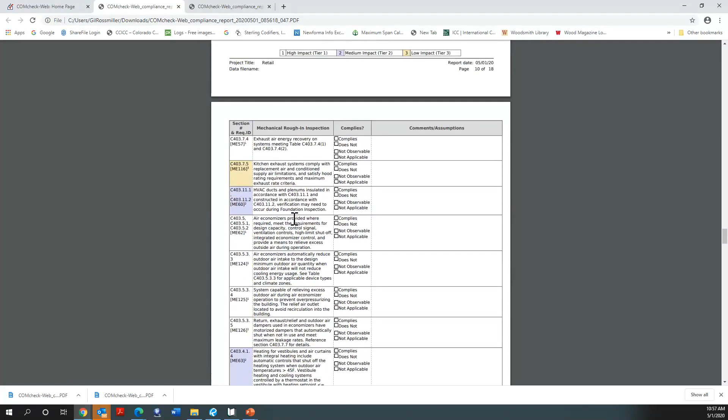We will hang. So here I'm just showing something that's got more of the comments on it. So we got mechanical rough in here, check boxes. So these are fairly generic pieces. So there might be a lot of these things that may not even occur in this building, and that's why it's nice when the designer comes in and actually hits a little checkbox and says, not applicable.

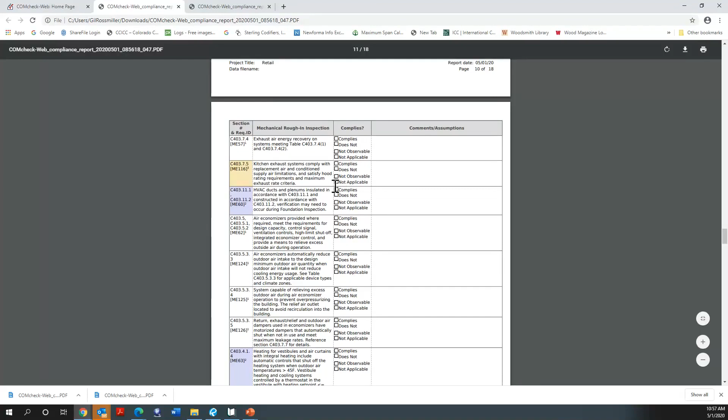You can see that on the screen. And then we can decide, yeah, is that true? Because if we don't have a kitchen exhaust system, why would we even have it, right? So it would be not applicable. So anyway, hopefully that was at least somewhat helpful to folks.